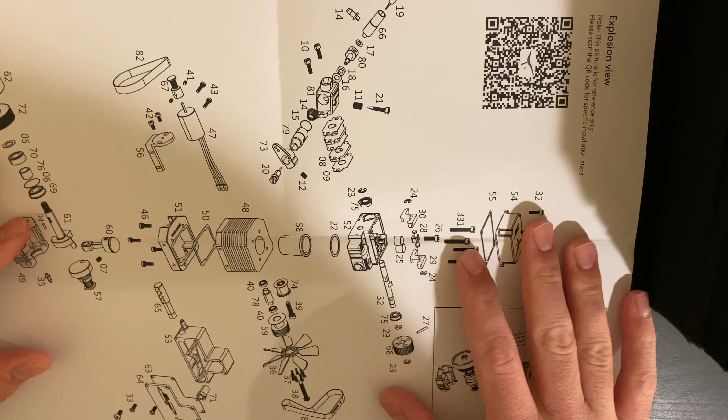So this is how all the bits and pieces are supposed to be assembled. So, this part is the carburetor, you got the starter motor, this part is like the crankcase with your oil pan, and this is like your crankshaft.

You got a tiny little piston. This is your muffler. As you can see, you even have an oil pan gasket, and you have a block.

This is a sleeved engine, so there would be a sleeve that goes into the block, and that's where your cylinder would rest. These are your fan components.

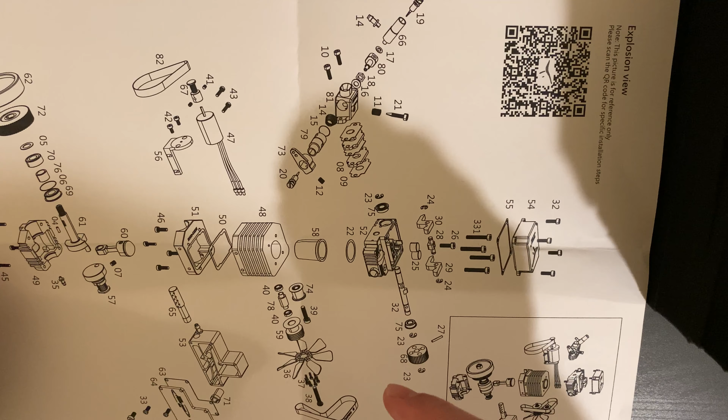You got a head, it's single overhead cam, it's 2 valves per cylinder. Actually, in this case, it's only 1 cylinder. These are your rocker arms, valve cover gasket, and you got a little valve cover.

So here are some of the specifics. As you guys can see, the displacement is 3.5 cc's, which means it's a 3.5 cubic centimeter motor.

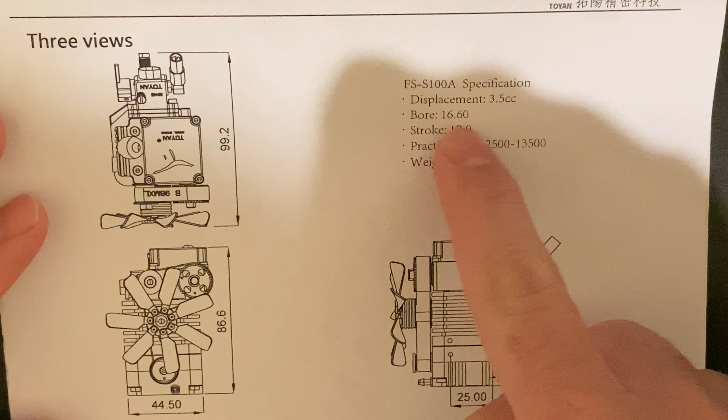That is very tiny. The bore, which is the diameter of the cylinder, is 16.60, I'm guessing millimeters. The stroke is 17, and that's the distance of travel of the piston when it goes up and down.

And then the RPMs are 2,500 to 13,500. So this engine idles at 2,500 RPMs, and it redlines at 13,500 RPMs.

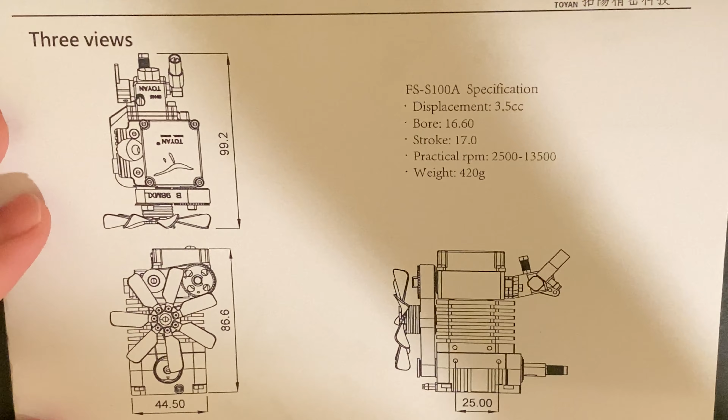To put that in perspective, a regular car with a normal gasoline combustion motor, probably the redline on that would be about 6,200 to 6,300 RPM. So this is literally double that.

And the weight is 420 grams. So it does have a weight to it, but it's not insanely heavy.

So let's start off with the exterior accessories of the engine, like the fuel tank, the glow plug, some of the starter components. So we've got the fuel tank.

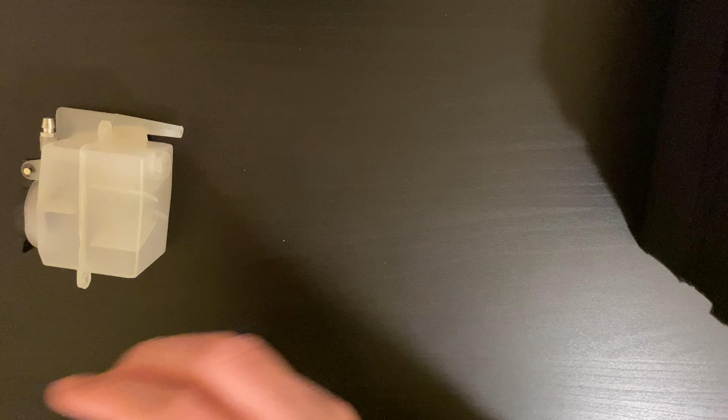We've got the starter accessories. As you guys can see, there is the glow plug in here, and you also got your little starter button. And I think this is what supplies the electricity.

We've got some fuel lines. We've got the oil pan gasket and probably the valve cover gasket. I know that the head gasket is a circular piece, so these are not one of them.

And these are our tools to assemble the engine. And then we got these 3 pieces, which come in this foam housing.

I don't know what they are or what they're supposed to do, but I'm sure we'll find out sooner or later. And these are the much smaller components, like screws and washers and bolts and some extra gaskets.

So let me actually pull this up to the camera so you guys can see much closer. So these are the carburetor components, these are crankshaft components, and these are the cylinder cap components.

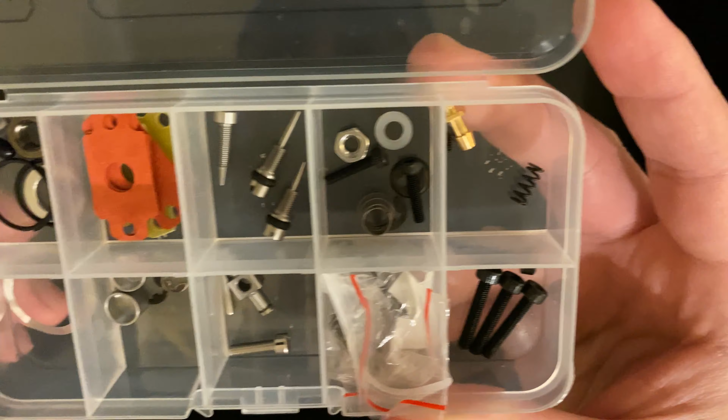You open it up, you guys can see. These are the spacers for the carburetors. This is your head gasket.

We got some bolts in here. I think it's for the heads, for screwing the head into the block. And some other washers and springs.

Some of the components in these little baggies are greased, which is a good thing, so you don't have to grease them yourselves. This engine does come with grease, and you guys will see that very soon.

These are some more screws. You got a starter motor components and a spacer. These are the engine cap screws, exhaust box components, like the inlet, little pieces. We also got some fan components in here, and these are the fan blades.

So let me open it up. So these would be our fan blades. And we also got some bearings.

Next, we got the parts of the head, or at least some parts. We've got our timing belt. Now this one, this bigger one, is your timing belt. This one is for the starter motor.

So this would hook up with your flywheel, and when the starter motor turns, it'll turn on the motor, it'll turn it over. This is, I'm sure, your flywheel cap. This is the flywheel itself. This is your camshaft gear.

We got like this muffler cover. And then this is kind of like your accelerator pedal. This piece is the carburetor. Let me see if I can take it out. So this is the carburetor.

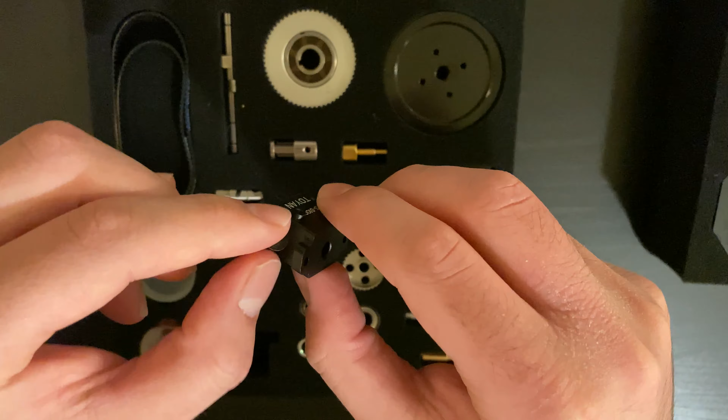So this is probably where it'll suck in the air. The fuel will probably go in somewhere through here. I think there will be like this golden piece that will screw into here, and then that's probably where it'll go through. We've got some bearings.

This one I think is your camshaft bearing. Actually, sorry, I think these two are. And yeah, this is also a component for your carburetor. Let me hold this up so you guys can see.

Oh, and this is the grease that I was talking about. So this is what you'll use to grease your cams or your cam.

And finally, we've got my favorite part. This is the valve cover. And as you guys can see, it spells out the brand for the engine, Toyan.

And if you guys could only see this in person, it's extremely beautiful. The quality is just out of this world. This is not a sponsorship video, but I'm just being honest. It is very beautiful.

This is the muffler itself. You guys can see the channels, and this is how it deadens the sound.

This would probably be your oil pan. This would be your crankcase. So this would go like right on top of your oil pan. And this is the little tiny glow plug.

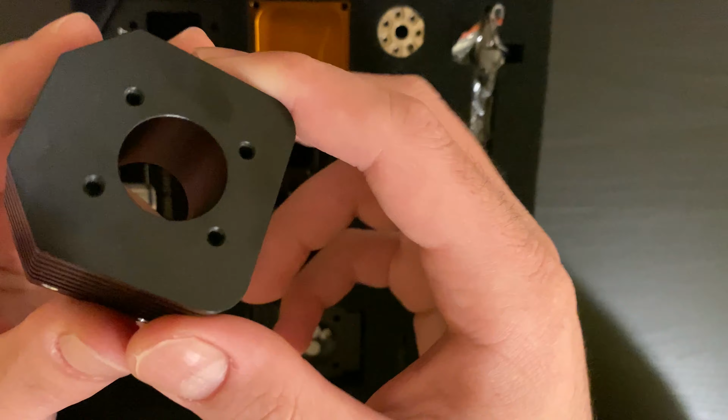This is the engine block itself. It does have a weight to it, but the quality is just very amazing. And this is where your sleeve would go, like you guys saw in the diagram. And this is where those set screws would go.

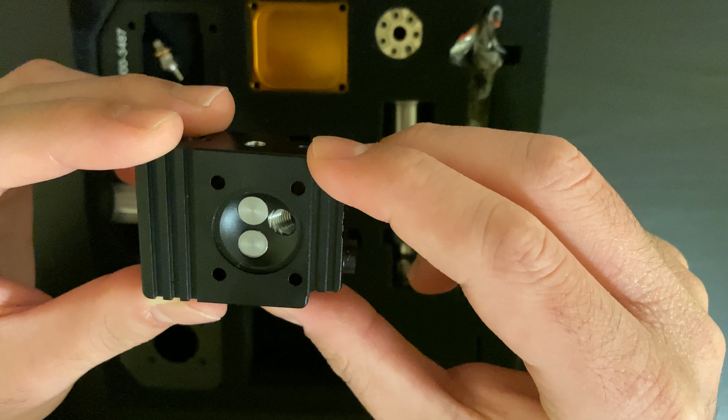This is the head. So you guys can see your intake and your exhaust valve. I think the intake valve is closer to the spark because this is a carbureted engine. So when the intake valve opens, I think your fuel would also come with it. And this is your exhaust valve.

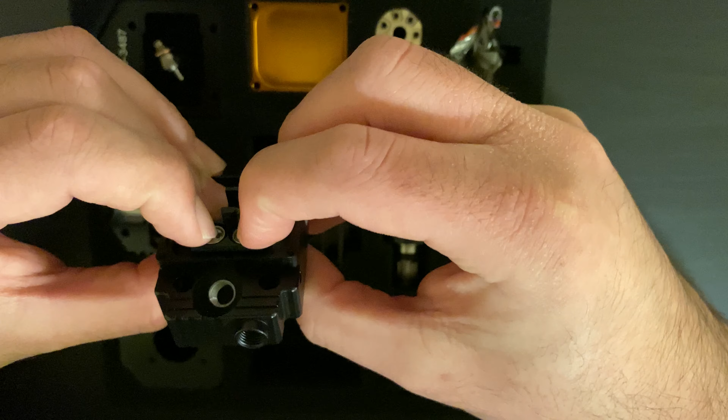So as the camshaft turns, it'll push the rocker arm and then it'll open these valves, as you guys can see. Let me demonstrate. So it'd be like this. You would have your intake, then compression, power, and then when it comes to the last stroke, this would open, pushing out the exhaust.

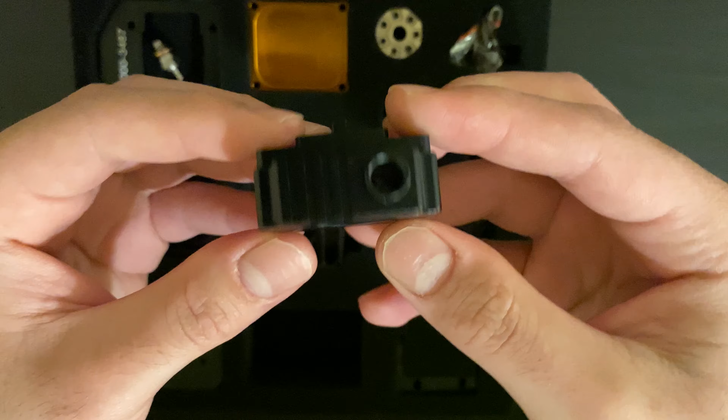This is, I think, by far my most favorite part of the engine. And it's this tiny little piston. Isn't it cute? It's just so tiny.

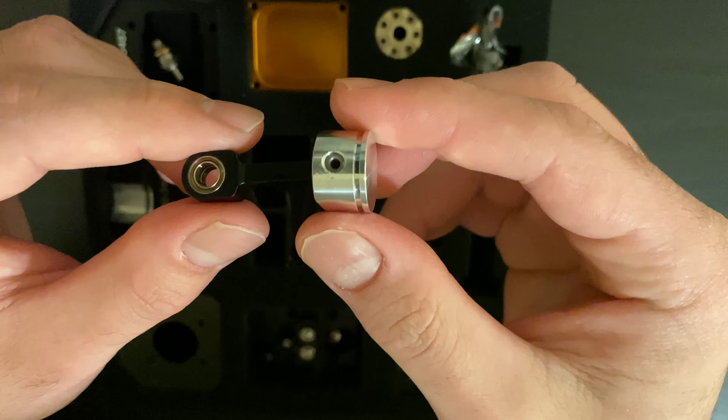Just look at that quality. Look at that machining. And you got your little bearing. Now, this one does not have a connecting cap with its little screws, but that's okay. I guess it's more durable, less things to fall off and break.

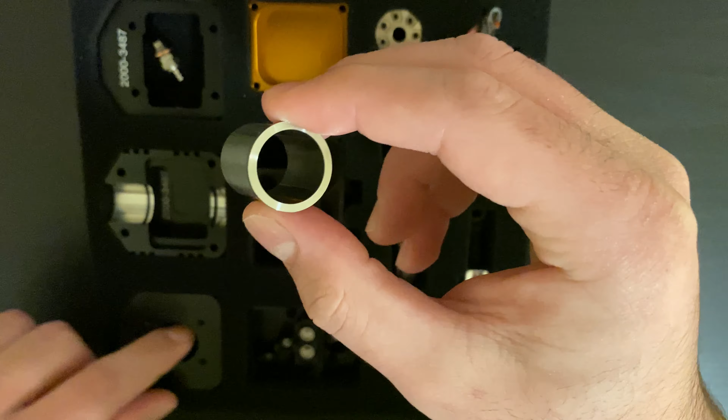And this is the bracket for your starter. This is the sleeve that I was talking about. So this would go into this piece. Like that.

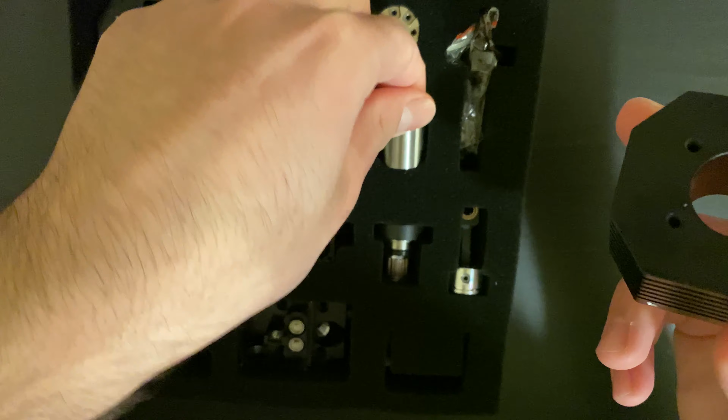And this is the piece for your fan, so your fan blades would get screwed onto here. And this is the crankshaft. And again, it's in a bag, so it means it's greased up. Again, that's a very good thing. So I don't have to grease it myself.

And yeah, those are pretty much the components. And you also got a piece of crankshaft, a part of the crankshaft. So these two will be together. And this hole in here, as you guys can see, this piece will go in like this. So it'll look something like this. And you'll have your piston that goes like that.

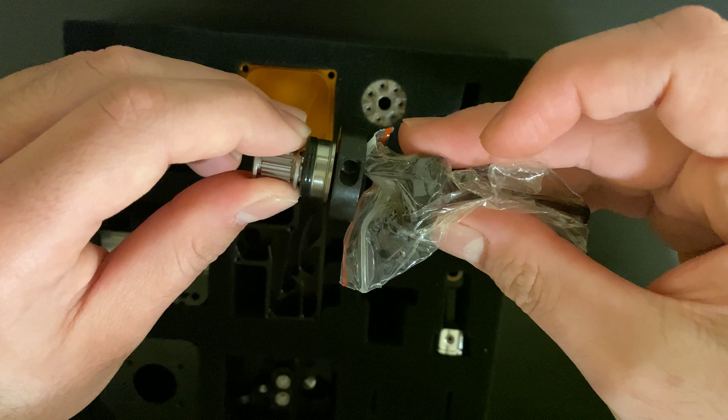So yeah, that's pretty much it. And I have to be honest, the packaging, when I first saw it, it just blew me away. It was very amazing.

And I highly recommend that if you are interested in this model engine and really love engineering and mechanical engineering and you're into automotive engineering, I highly recommend that you check this engine out. It's called the Toyan Fs series engines.

You can also get the 2-cylinder and the 4-cylinder variants. But I highly recommend this 1-cylinder because this is the only one that you can actually get in bits and pieces and build. You can request one that is all put together, but I purposely chose the one that's in pieces because I think it's just more fun to build your own engine.

And the greatest accomplishment that you can ever have is to see something that you built run.